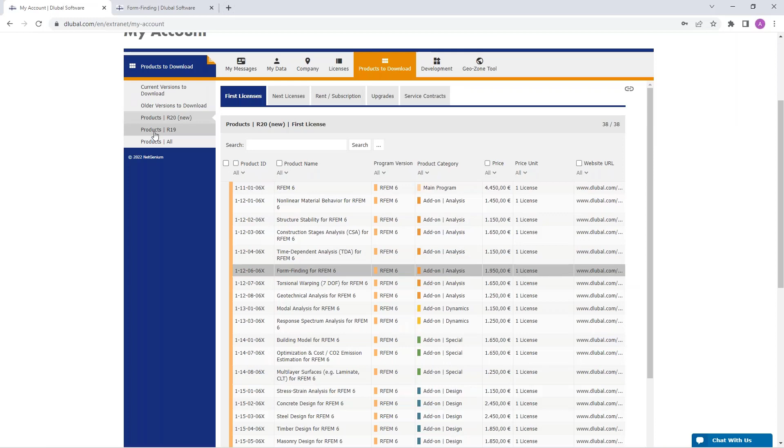Then the products of the old generation, also with a link for more information and all products.

Then development - you can see, for example, implemented features. You can filter for a product. For example, I select steel joints, the newest features in steel joints, like the rectangular hollow sections, a quite new feature.

Then the same for RStab 9, R section, and so on. Then open features - those are features that we will implement in the future. You can see some are in progress, some are open, and you can filter for every product.

Then you can submit your own feature request. If you wish that we implement any feature, just describe it here. You can add an image, a file, and so on, and we will decide if we implement that feature.

So you can see submitted features of all users, and you can see here the submitted feature requests, your submitted feature requests. Okay, the last table is the Geo-Zone Tool.

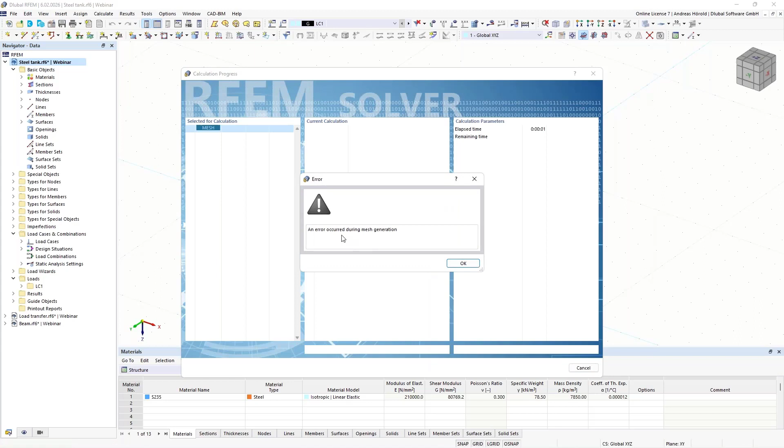Let's try it. We want to create a mesh, and we get this error message: it's currently not possible to mesh a quadrangle area on the 360-degree circle. We are working on a solution, and in the meantime you need to use a workaround.

The surface must be divided into several quadrangle surfaces. I will show you how to do that. I delete the two surfaces.

Then I copy these two lines here right above - or I copy during a rotation using the function rotate selected objects. I check create copy, one copy, 180 degrees. The axis should be set to that axis, and the rotation point should be the middle of the circle.

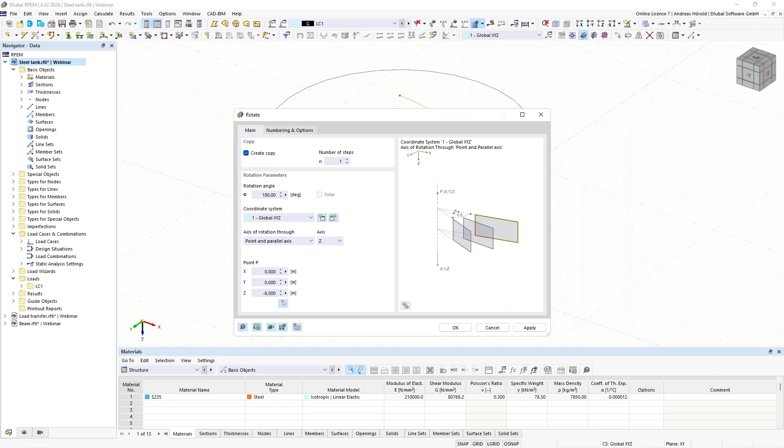Then I use the function here right above, connect selected lines, and with that window I divide the circle into two lines, also the lower circle.

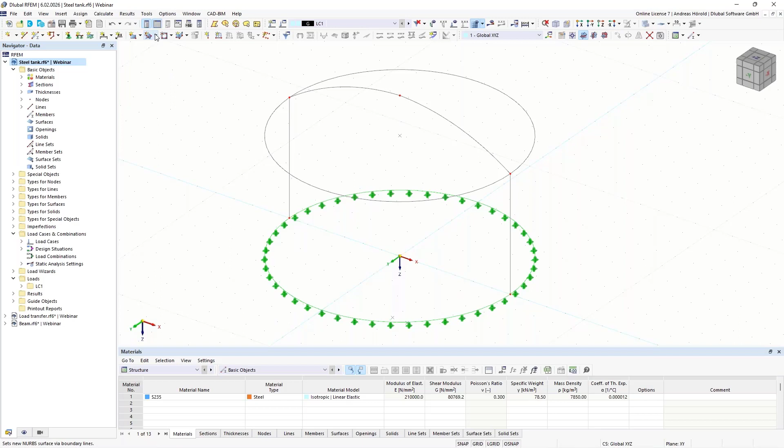Now I can create the new surfaces - those should be quadrangle surfaces, now with the same thickness as before, 12 millimeter.

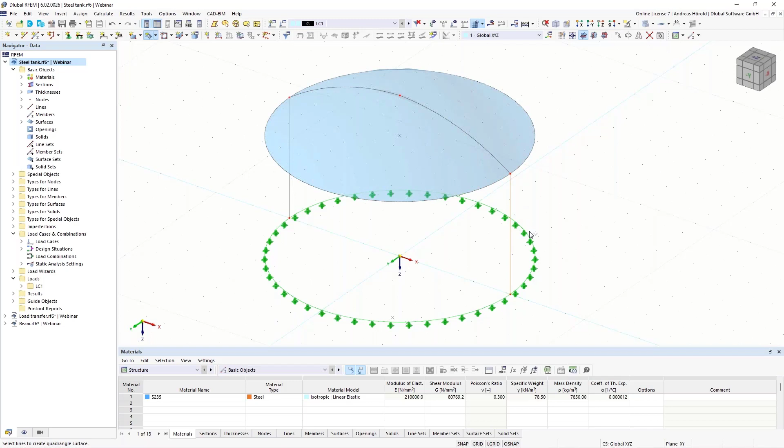Okay, and I select the boundary lines, and I create 4 surfaces now.

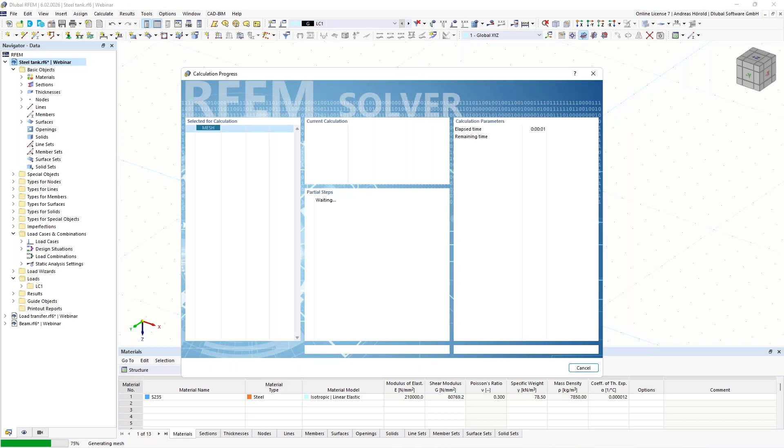Okay, so now we can create the mesh. That works - now it's only a workaround during the correcting of that bug.

Okay, then we turn to the next question: how can free nodes be deleted? From time to time during modeling or after an import, it can happen that free nodes are created.

For example, when you import your model from a CAD program, these nodes can easily be found. At first, I create some nodes, some free nodes.

And I can find them with Edit, Select, and Free Nodes. There's also a shortcut, Control, Shift, and F key. I select them with the function.

You can see now they are yellow, and you can delete them by pressing the delete key or with a right mouse click on one node, and you can choose delete nodes. Okay, that's the solution for that question.

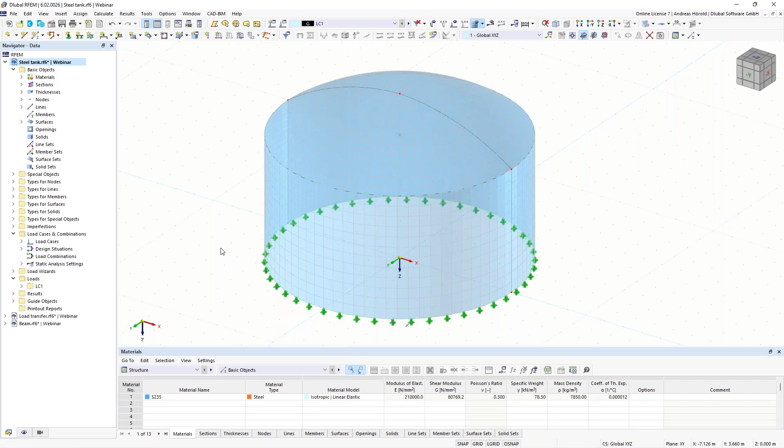So then we turn to another model and another question. The question is: how can uniaxial load transfer be generated by a distributed load on members?

There are two possibilities. The first possibility is to use a surface called load transfer, or the load wizard. I will show the two possibilities.

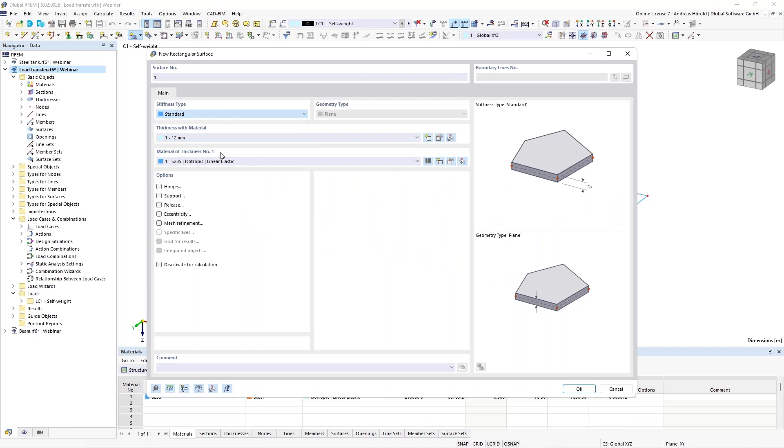So I start with a surface - stiffness type is load transfer. That surface has no stiffness.

Okay, I select the nodes here on the edges. So now we have got three surfaces, and we create a surface load.

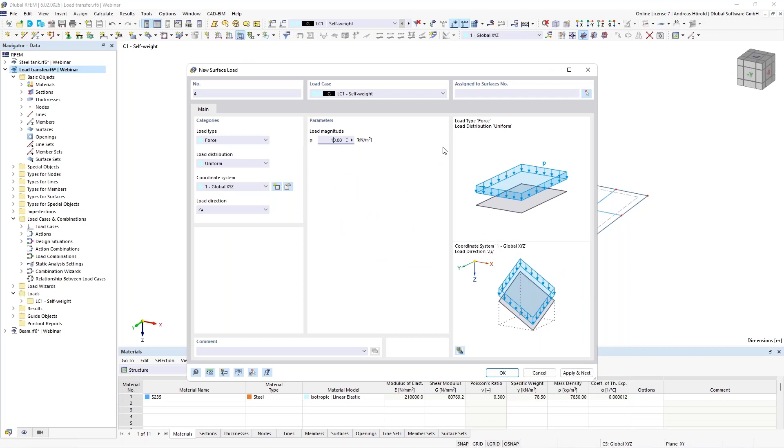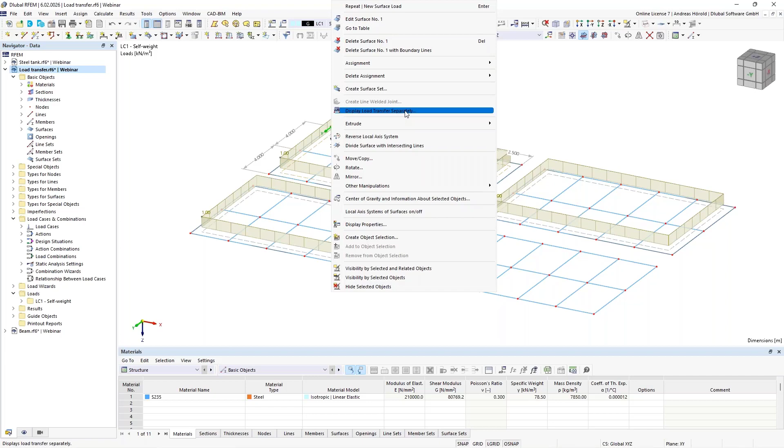I choose 1 kilonewton per square meter. I can divide this load or divide the display, for example by clicking on the surface and selecting display load transfer separately. Only the display is then separated. This is the first solution, and I can undo that.

Now I'll use the other solution. In the navigator display under surfaces, you can check display load transfer separately here.

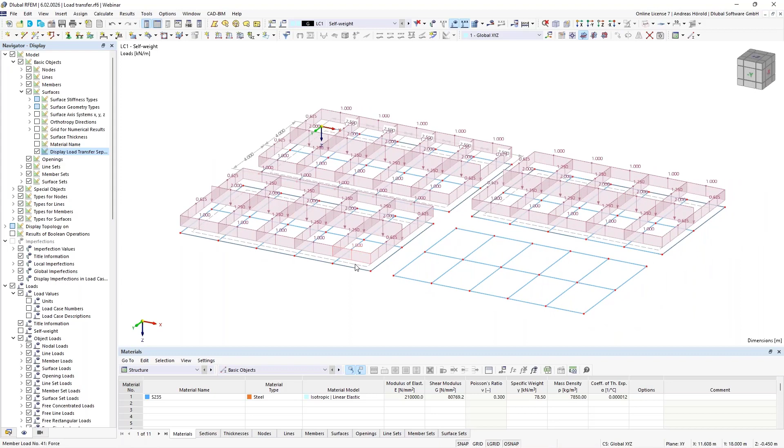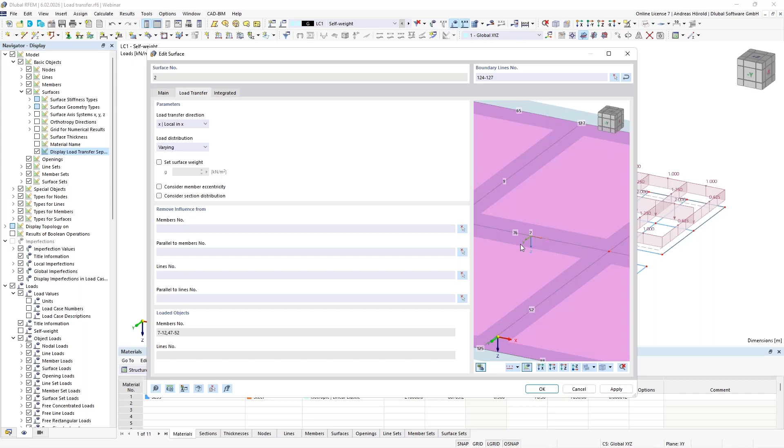Let's change the load distribution. I double click on that surface, go to load transfer, and can change the direction. At the moment it's both directions, and I select for this example local in X. If you click on that button here, you can see where the X direction is. That's the local X direction of the surface, and that's the Y direction.

I would like to use the Y direction here. Double click, then Y direction. Now before I leave the dialog, you can select that button here and assign a load for the surface weight.

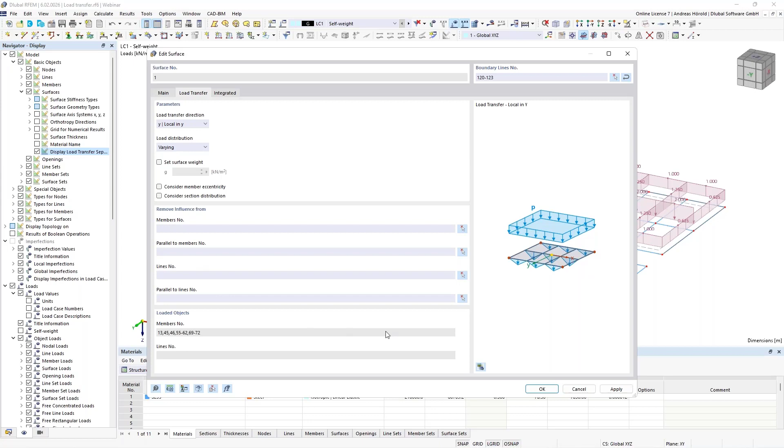Or you can remove members from the loading with, for example, that function here. Here we have got two directions. At the moment it's not yet possible to assign a varying load, but you can do that with the load wizard.

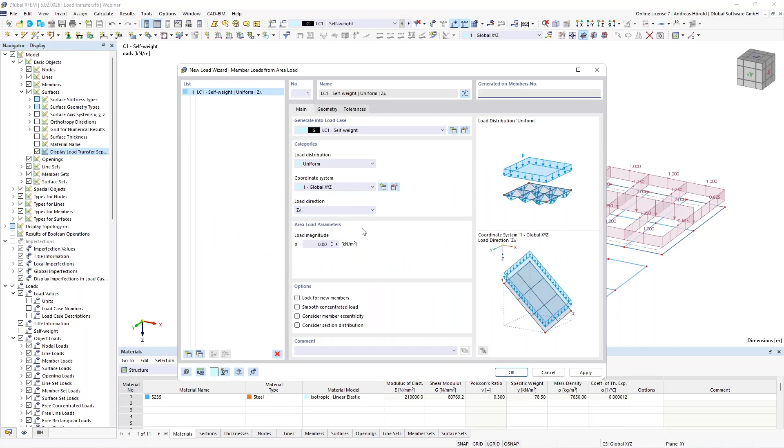I will do that with Insert Load Wizards, member loads from area load, with a load of 1 kilonewton per square meter. Then I have to select the geometry, the 4 edges.

I can remove members from the loading. All members that are parallel to that member shouldn't get any load. That's the same as for this surface. We can change that - I would like to transfer the load in both directions.

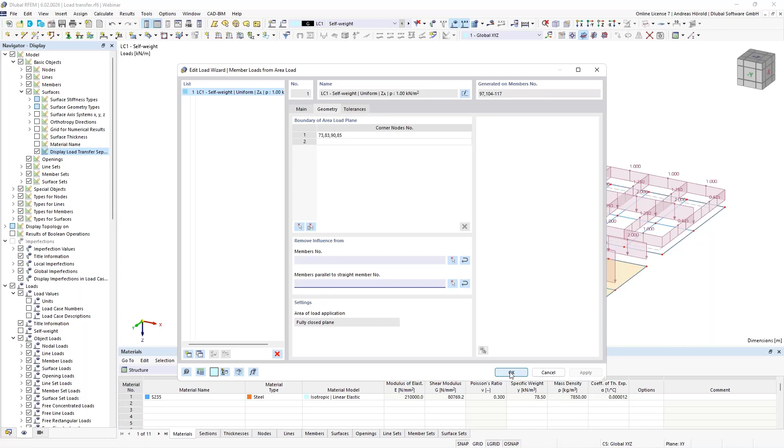Now you can see where the varying loads are. Those are the possibilities to assign loads or surface loads on members.

Then we turn to the next question: how can I change the language in the printout report? I create a small printout report.

Under Edit, you can find the languages, and there are 11 languages, meaning you can translate your printout report into 10 different languages. For example, into French, and it takes only some seconds to translate the whole printout report.

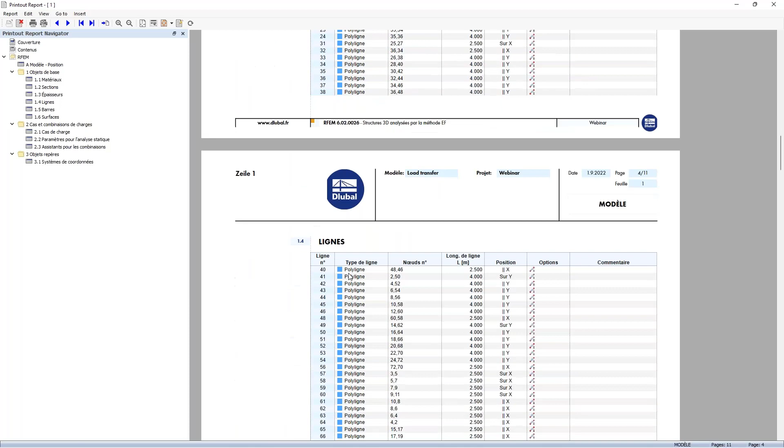Now all is in French. So I use again the English language. At the moment, it's not yet possible to create your own language or to add technical terms in a table, but we are working on that, and we will implement it in the future.

The next question is, how can I move a PDF file to any position in the printout report? You can insert different things, for example images, plain text, HTML files, formulas, and also a PDF.

I insert a PDF with only one page. If you've got more pages in the PDF, you can select only, for example, page 1 and 2 and so on. In my case, it's not necessary because I've got only one page.

Then you can define left and right margins and so on. I must use all pages because I've got only one page. By default, this is always added to the end of the printout report.

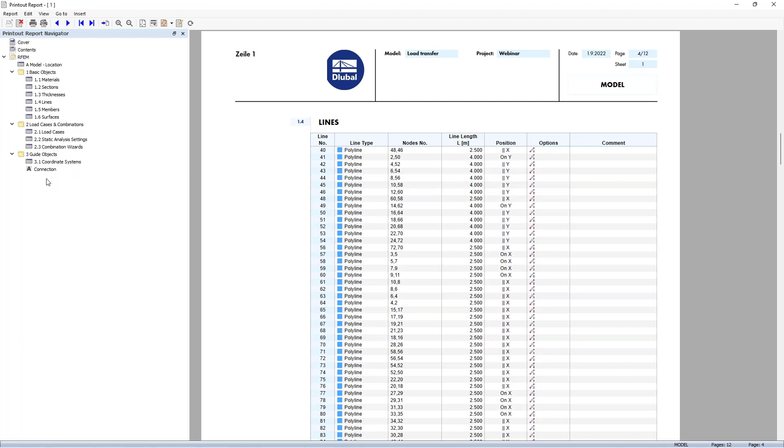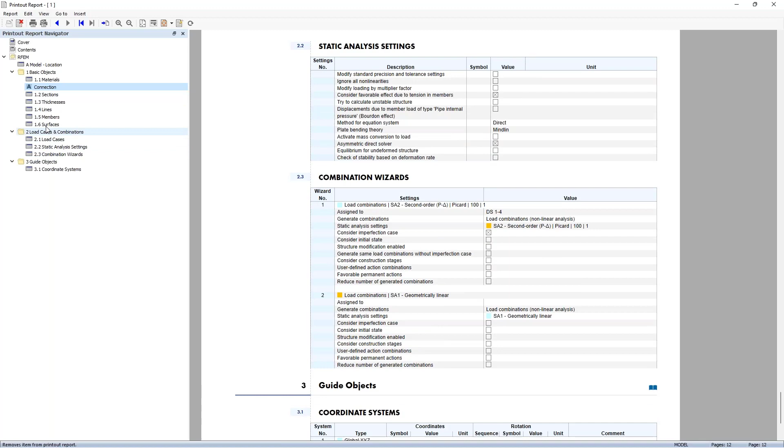It can be moved via drag and drop. For example, drag and drop. Also with the right mouse click, you can move the item to the top, the paragraph, then move item down and so on. You can also move chapters by right click or drag and drop, and it will be renumbered.

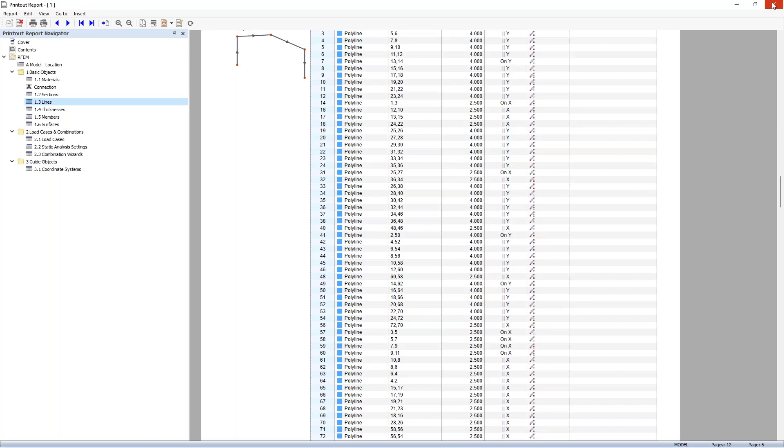The same is valid for images, text blocks, and so on. You can see it's quite easy to handle. Then I close the printout report.

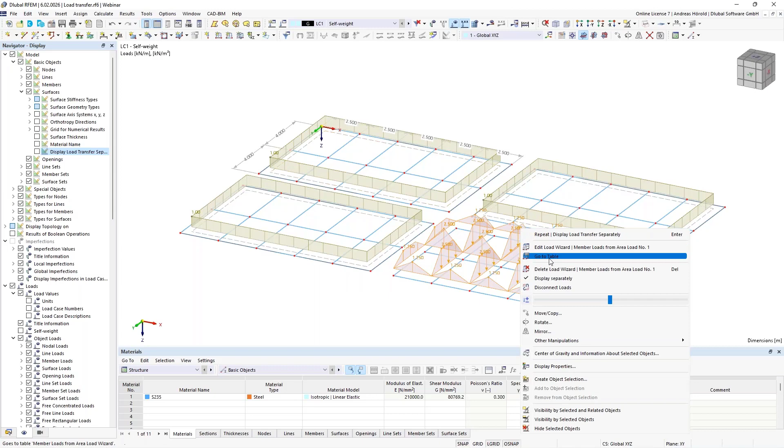We turn back to RFEM, and the next question: how can I increase or decrease the loads uniformly in a load case? I let the loads display not separately, so you can see the effect. Now we've got the surface load of 1 kilonewton per square meter. You can use that button above, edit active load case, or search the load case in the navigator data and double click on it.

There are different static analysis settings available. By default, a load case has the geometrically linear analysis setting. For example, if you have more than one load case and would like to increase the load only for that load case, I recommend copying that static analysis setting. To do that, I use the right button here.

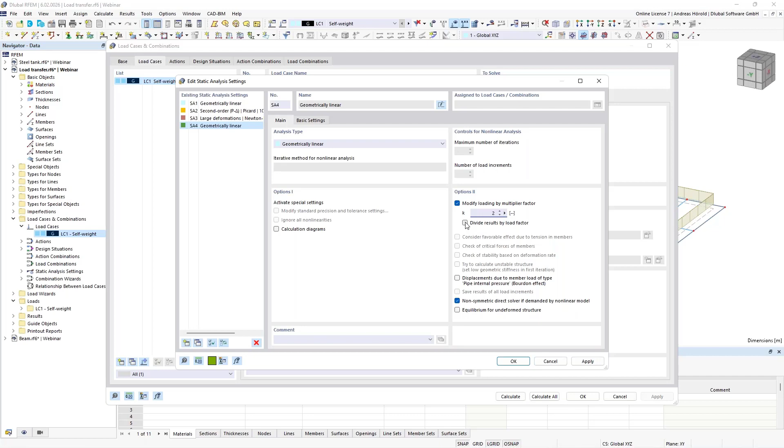So I can copy that static analysis setting, and then on the right side under options 2, I can modify the loading by a multiplier factor. For example, I can use 2. You can also divide by a load factor.

I leave the dialog and choose for the self-weight load case the 4th static analysis setting. Then I leave the dialog, and you can see 2 kilonewton per square meter has been applied to the self-weight load case. It's the same workflow for decreasing the load of one load case.

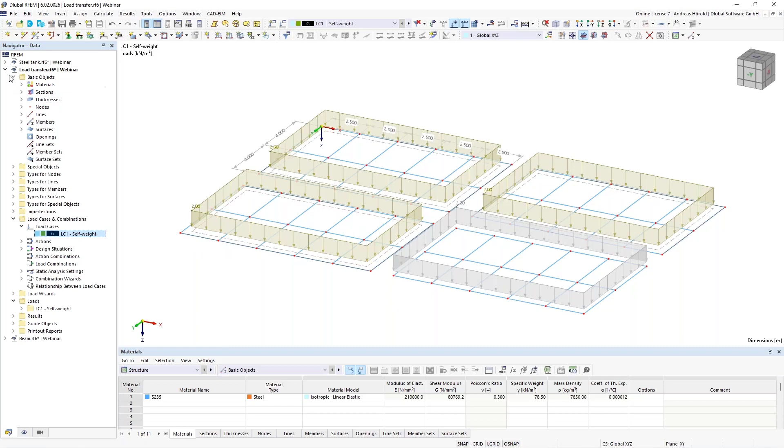Then we turn to the next model and the last question: why is reinforcement uniformly distributed around the circumference? When we display the concrete design and the reinforcement on members, you can see at the moment there's no required longitudinal reinforcement at the top and on the bottom. So how can we solve that?

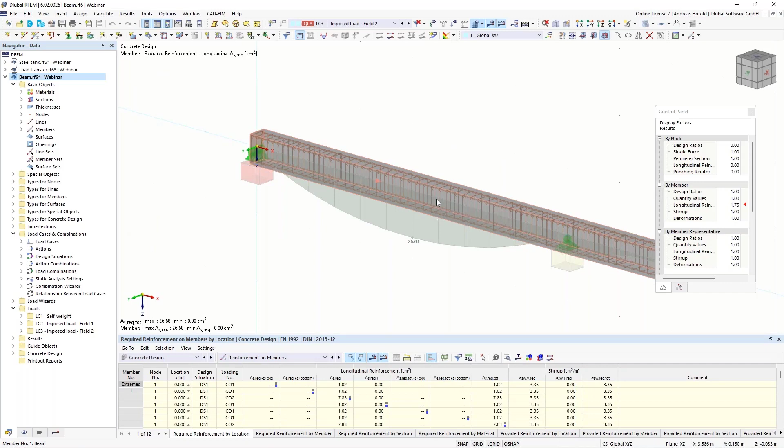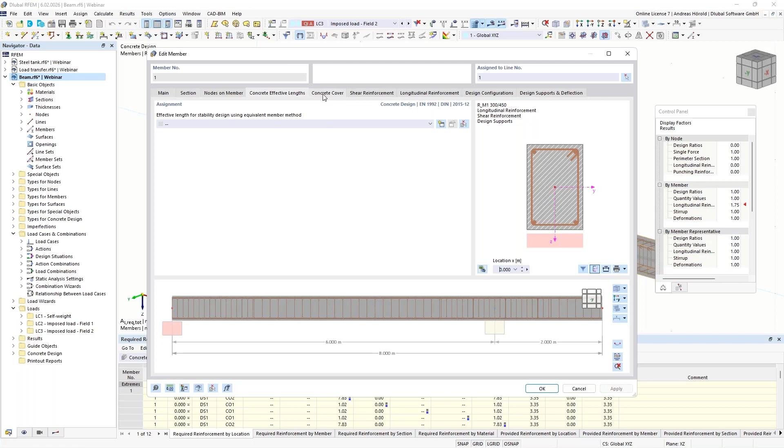You can double click on the member. Where are the settings for the member? I can shortly click through every dialog: main and section, nodes on member, the effective length. If you have effective length, you can take a look at the settings. For this member with bending, there are no effective lengths defined.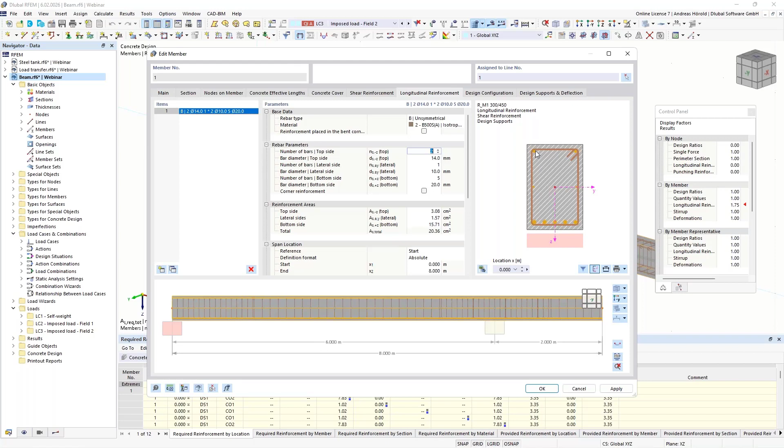Then for design configurations, we will take a look and use the edit button. You can see also here's a wrong setting. The reinforcement layout for the required reinforcement is uniformly surrounding, and I will change that to a top and bottom symmetrical distribution.

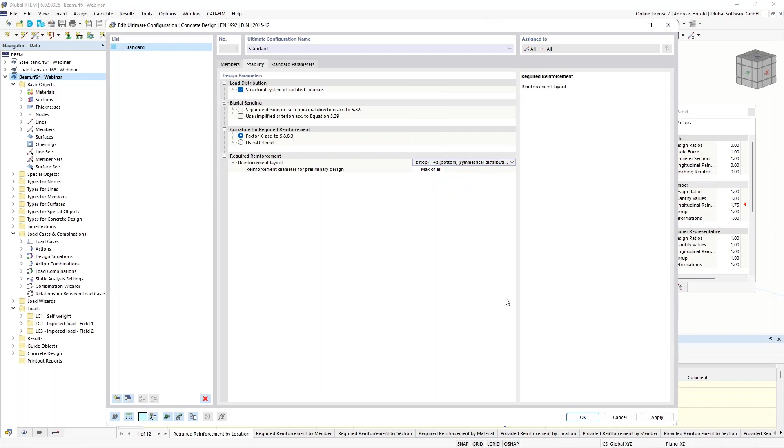Okay, then we can take a look at the stability. Also here uniformly surrounding is selected, and I use the same distribution, the symmetrical distribution. Okay, then we can apply that and calculate all again.

Now just take a look at the parallel calculation. Our solver uses all cores of your computer. So then reinforcement on members, and now you can see the required reinforcement on the top and at the bottom.

Okay, that should be all to the 8 questions.